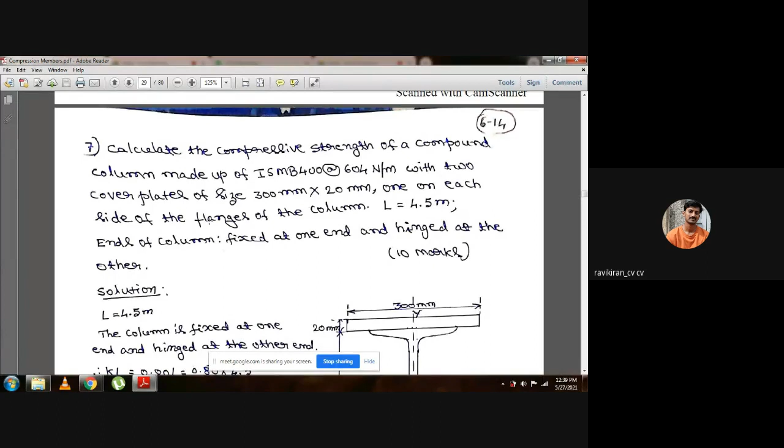Let us take up the problem. Calculate the compressive strength of a compound column made up of ISMB 400 at 604 Newton per meter with two cover plates of size 300 millimeter by 20 millimeter, one on each side of the flanges of the column. The column length is 4.5 meter, this is the actual length, not the effective length. The column has two cover plates, one at the top and one at the bottom, each of size 300 by 20. You can see that in this picture.

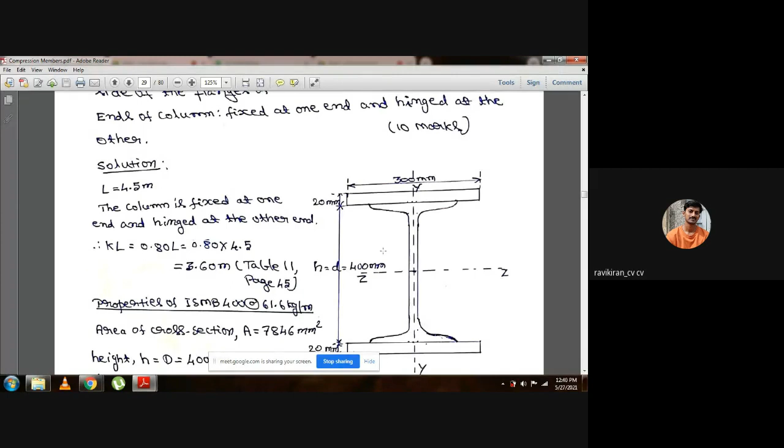Sometimes a picture will not be provided, so you should be in a position to draw these pictures yourself. For that, you should have proper imagination. So according to the question, correlate this picture. Once the data is provided, immediately draw this, and write down whatever data is given. So length is given as 4.5 meter.

The column is fixed at one end and hinged at the other end; this condition is given in the question. Once we have the actual length and support condition, we can calculate the effective length from page 45 of IS 800, Table 11. For this condition, the K value becomes 0.8, so the effective length of the column will be 3.6 meter, that is 0.8 into 4.5 gives us 3.6 meter.

Next, once we have this ISMB 400 section as provided in the question, you need to note down the values. Any one of you please open the steel table and tell me the sectional properties of ISMB 400 at 61.6 kg per meter. Anyone?

I want you to tell the sectional properties by opening your steel table. Okay, let us ask somebody specifically. Aishwarya, 18CV003.

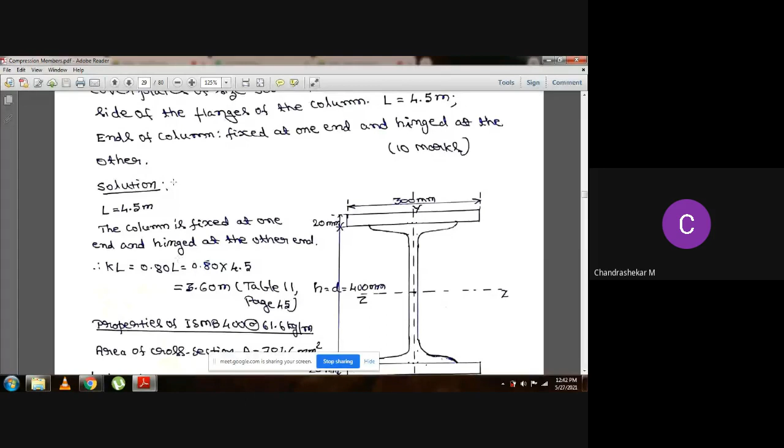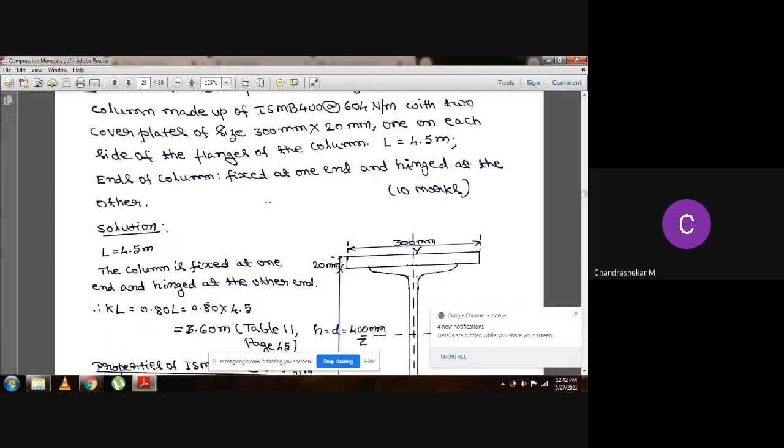Tell me the sectional properties of ISMB 400 at 61.6 kilogram per meter. That is nothing but, if you look at it, whatever is given is in terms of Newton, so to convert 61.6 kg per meter you need to multiply that value by 9.81. As of now you don't have to multiply that. Go to ISMB 400, tell me the properties, because there is only one ISMB 400.

Sectional area 7846 mm square. Depth of section 400 mm. Width of the flange 140 mm. Thickness of the flange 16.0 mm. Thickness of web 8.9.

So how about the IXX value? What do you call that IXX value as? What is the IZZ value? 20458.4. That's it, okay, proceed. That is the value.

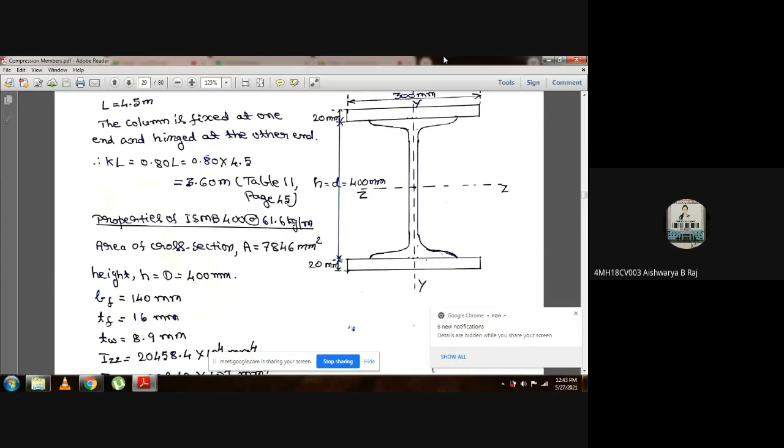Now if you go up in the same column, what does it say? IXX, the value multiplied by 10 power 4 mm power 4. Exactly, you need to multiply whatever value you get from the table by 10 to the power of 4, and the unit of that moment of inertia is millimeter to the power of 4. You got it? Yes, sir.

Any other student? Some students are leaving once we started asking questions. No problem, we'll note down and ask them questions tomorrow, it's not a problem. So whoever is leaving, just... that is good enough, I think you are looking at the table properly. One more thing: what is the value given here for moment of inertia about the horizontal axis? It says from the steel table as IXX. Dilip Kumar left, so let me write down all those names.

Okay, it is given as IXX from the steel table. So when you are writing details in the notes, we have written IZZ. The reason is the IS code does not use XX anymore for the horizontal axis. Now it calls it the ZZ axis instead of XX axis. But the steel tables still use the old style. So whenever you need to get the IZZ value, you should look for the IXX value from the steel table. Similarly, if you are looking for RZ value, you should look for RX from the steel table.

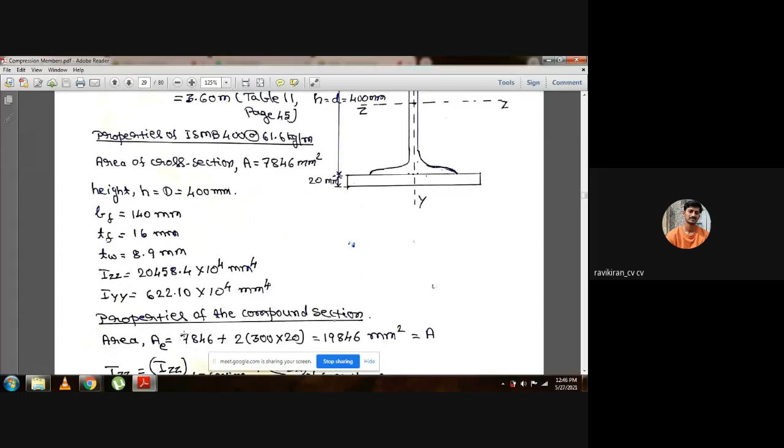So after IZZ, the IYY value is 622.10 into 10 power 4 mm power 4. And once you got these sectional properties, the next step is to...

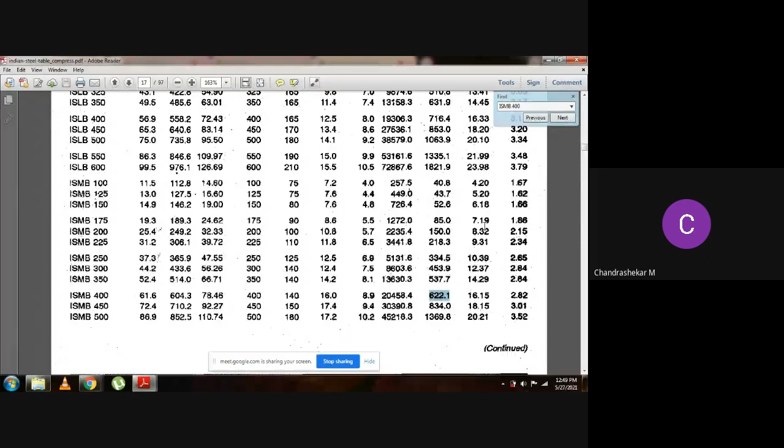So I'm getting the BD cube by 12 value. Okay, it looks like 622 is correct. Width of flange ISMB 400, thickness of the flange is 16.

Okay, one second. So 16 is the thickness of the flange, width of the flange 140, 140 into 16 divided by 12 into 2. I'm getting a different value here.

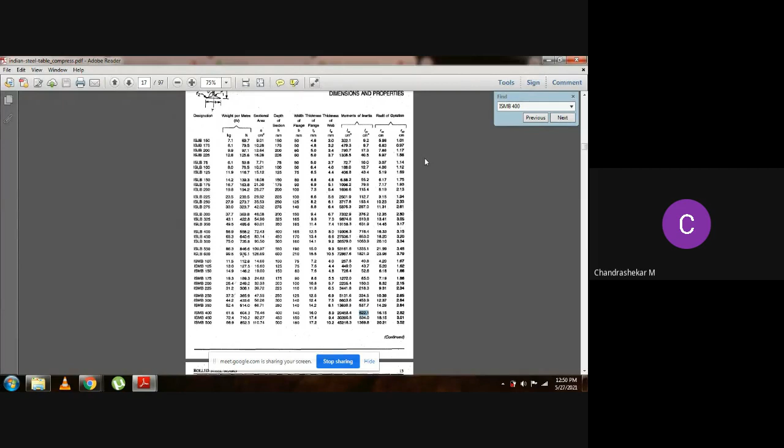Anyway, it is 622, makes logical sense. Students, okay, let us consider for the present moment 622 and we'll continue.

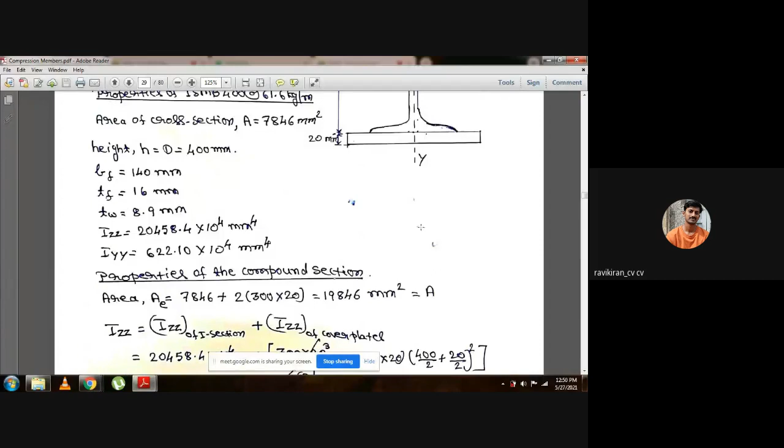Okay, IYY value is 622.1 into 10 power 4. And once you got the sectional properties, the next thing is to calculate the properties for the compound section. Whatever you have written is for only the I section, but here it is a compound or built-up section, correct? Additional plates are there. So for this, you need to calculate the whole section's area as well as the I value.

For that, what is the total area? Total area will be I section area plus 2 times the cover plates area. So cover plate is 300 width and 20 mm thickness, into 2 for the 2 plates. So the total area will become 19846 millimeter square.

Same way, I value for the whole section: the IZZ value is here, which you have taken from the steel table for the I section. Same way for the cover plate, you need to calculate that in terms of BD cube by 12 plus area into H square. So we are in the ZZ plane.

So if you look at the figure, this is the ZZ plane. So the breadth will become 300 and depth will become 20. 300 into 20 cube divided by 12 plus area is 300 into 20, into H square, or area multiplied by H.

H means from the axis to the center of this point, the center of the cover plate. So half of the I section is 400 divided by 2 plus 20 divided by 2. That is what we have written here.

Just cross check, the area is 300 into 20. Somebody has not muted their microphone.

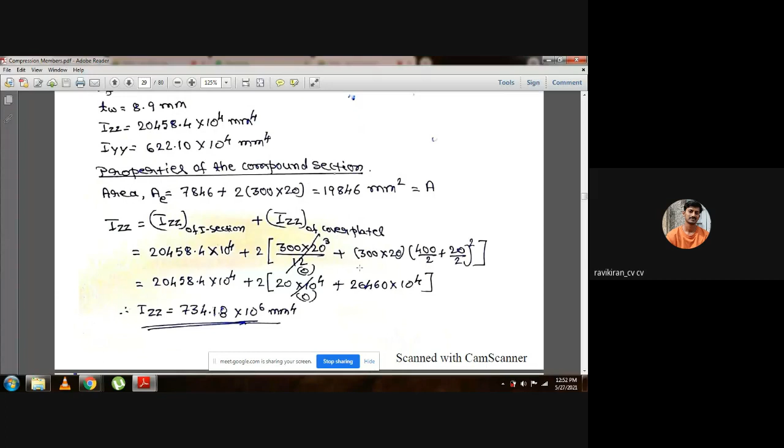Same way, 400 by 2 plus 20 by 2, whole square. So if you solve this, so Chandrasekhar sir, would you like to say something about this? One second. Yes, sir.

See, if you look here, I have ignored the value 300 multiplied by 20 cube by 12. If you don't ignore it, if you include this value, let's check with a calculator.

See, if you consider this, multiplied by 2, you will end up getting 4 followed by 5 zeros. That is going to be the answer, expressed as 0.4 multiplied by 10 to the power of 6. So when you add that to this value, you will get 734.58 instead of 734.18.

By considering this, it hardly makes any difference. If you want, you can go ahead and add that value. Instead of 734.18, you get 734.58. The reason I am ignoring this is to make it a habit to ignore small numbers.

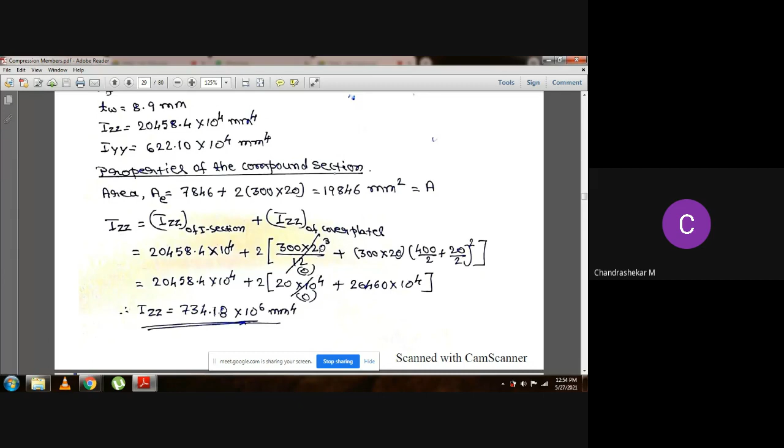When it comes to moment of inertia of the plate, what is the width of the plate? 300, the top width of the plate, multiplied by 20 cube by 12. Go to the figure. See, BD cube, that is 300 multiplied by 20 cube by 12, is a small number.

But when we find the moment of inertia of the same plate about this other axis, it will be 20 multiplied by 300 cube by 12. In this case, you should not ignore it, because 300 cube will fetch a big number. So you should not ignore this. Here, you can ignore it.

Go to that calculation a little bit. Yes. So now I'm ignoring this.

The reason is, say for example, I set a question such that 20 is the thickness of the plate, and I ask you to find out what thickness of the plate is required, given the load. Then 20 becomes unknown, say thickness of the plate, T. The T will become unknown.

If you keep T as unknown, you will get the final equation in terms of T cube. So to find T cube, you will have to solve a third degree equation, which I know almost all of you don't know how to do.

Even if you know how to do it through iteration, it will take some time, especially in the examination, it consumes a little bit of time. So by ignoring this, you can easily get the value of the thickness of the plate without getting a third degree equation.

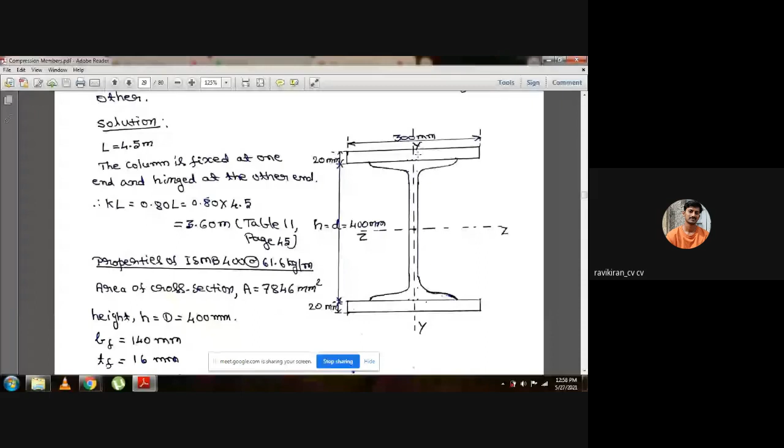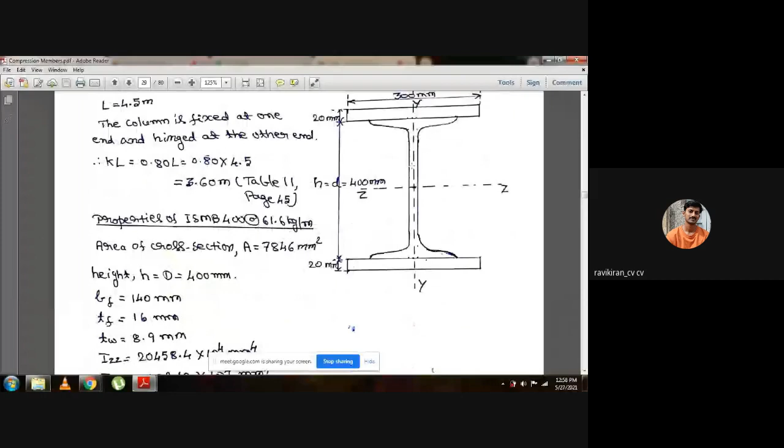H will remain exactly at this particular point. From the axis of this I section to the axis of the plate will be the value 0, so that will not come into the picture. That's why we have written just BD cube by 12 here.

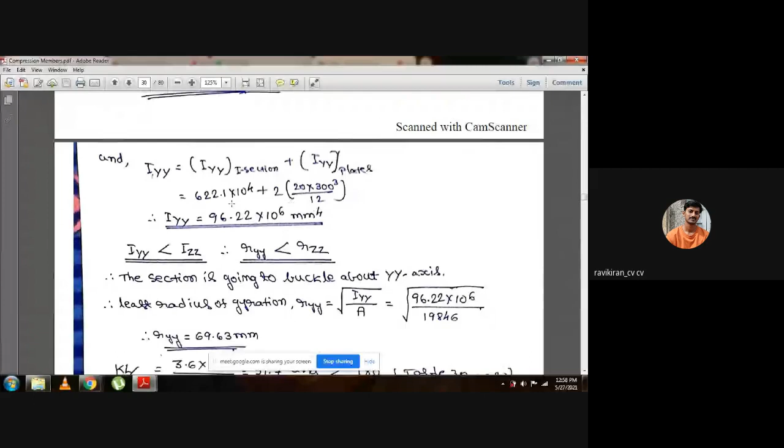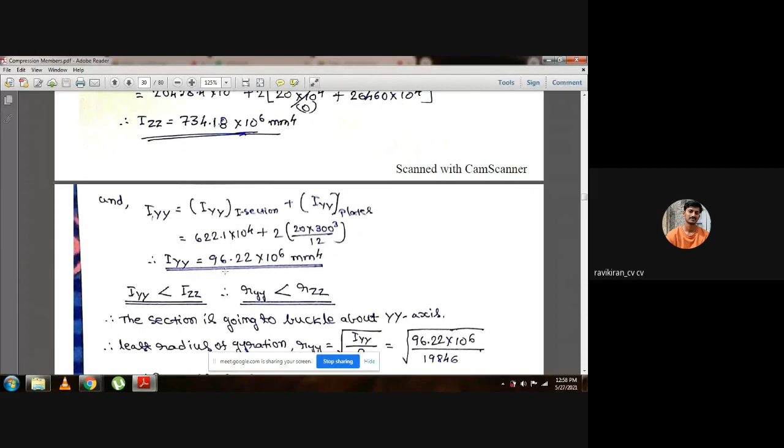Multiplied by 2 because 2 cover plates are there, so IYY value is 96.22 into 10 power 6 mm to the power 4. Once you found both IZZ and IYY value, you should compare these two to find out whichever is the least. Least is in terms of YY direction, right? So when it comes to YY direction, the radius of gyration, if you check, RYY will be lesser than RZZ.

So the buckling class will be in terms of YY axis. Buckling will act in terms of YY axis. So the least radius of gyration, how to calculate? R value is equal to square root of I by A. If you use R value in terms of YY axis, I value also you should use YY axis.

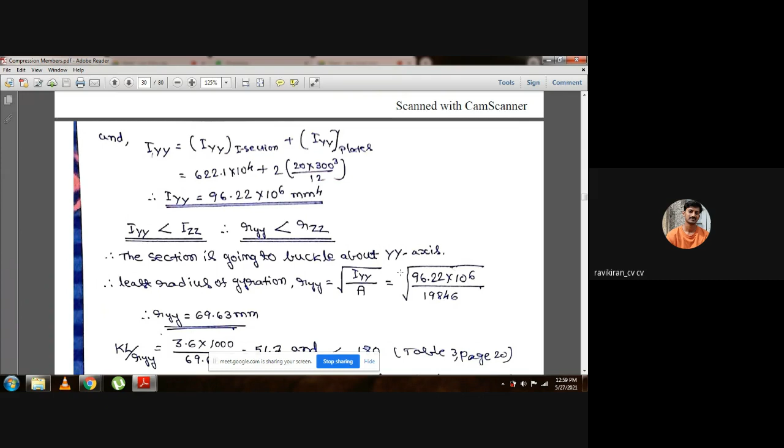So 96.22 into 10 power 6 divided by total area will give you radius of gyration as 69.63 millimeter. So as it is in YY, KL by R. What is this KL by R? This is slenderness ratio. Why do we need this?

Because if you want to calculate FCD from the table, or if you want to pick up the value FCD from the table, correspondingly you need this KL by R value. So if you do KL by R, and this 3.6 is effective length after multiplying with the factor by considering support condition, and 1000 is just from meter to millimeter, divided by RYY which is 69.63, will give us 51.7.

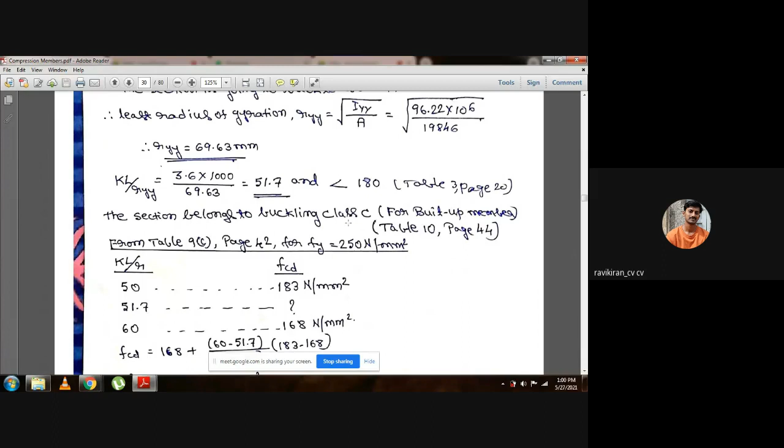And for this 51.7, if you open buckling class C for a built-up member, open table 10 of page 44, it is given for different sections what buckling class you should consider. As it is a built-up section, we should choose buckling class C. That is given in the last row of the table, if you just observe the table you can find out.

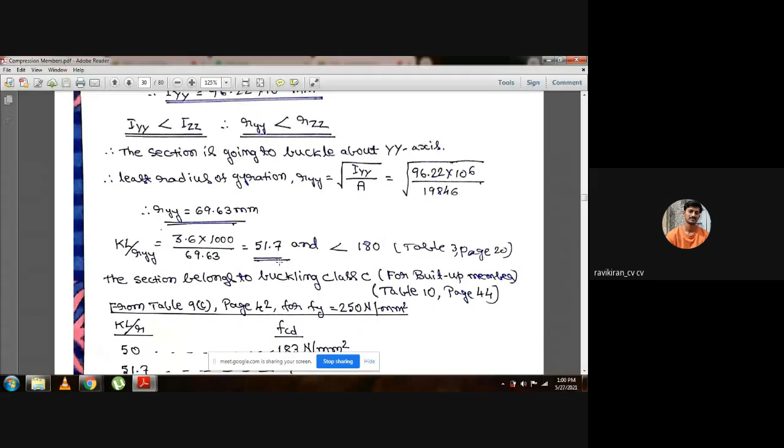So we are going to decide it is buckling class C, and then from table 9C, can any one of you tell me for 51.7, or for the 50 value of KL by R, what is the FCD value? Anyone from the students? For KL by R value 50, open table 9C, page number 42 of IS 800. Anybody?

Okay, Arihant. Hello? Hello? Meghana? Meghana? Sir,

What is the value of design compressive strength for slenderness value of 51 or 50 from table 9C, page 42?

For how do you get 50, for table 9C? For 50, 183, sir. 50? Hello? Yes? For 50, 183. Yes, sir.

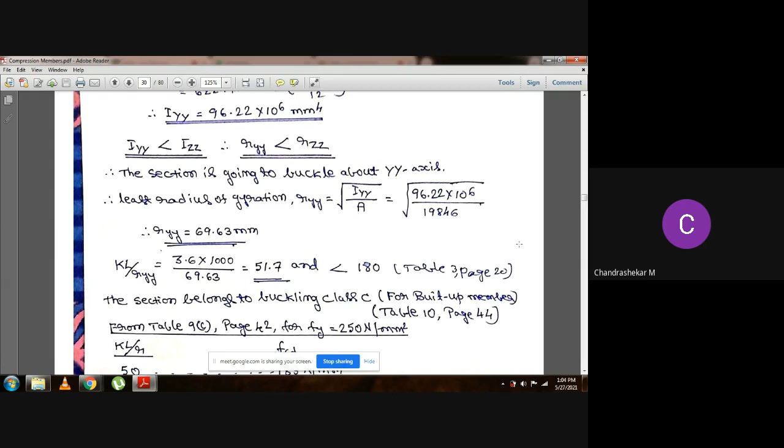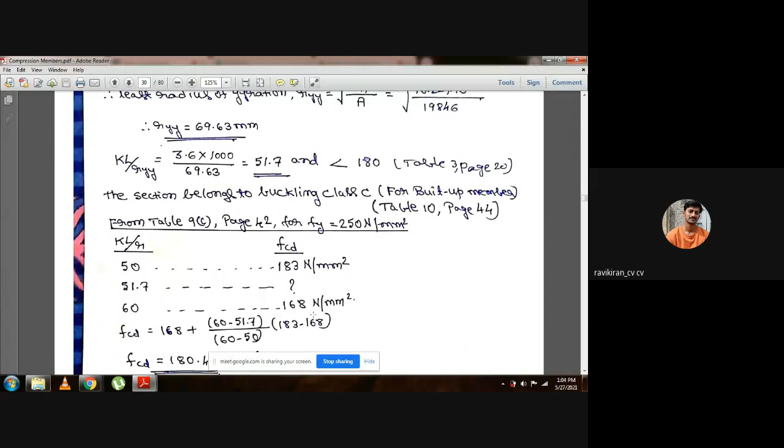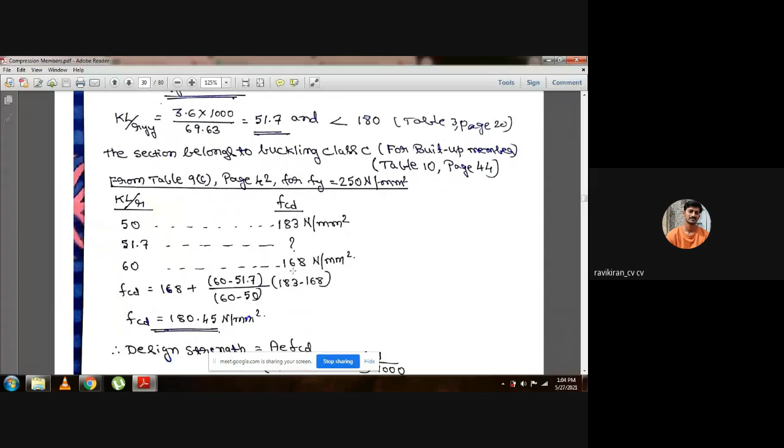So for 50, you have got the value 183. Same way for 60 of KL by R value, it is 168. But we want at 51.7, so we need to interpolate with these two values, that is 183 and 168. If we do that, FCD value finally will be 180.45 Newton per millimeter square.

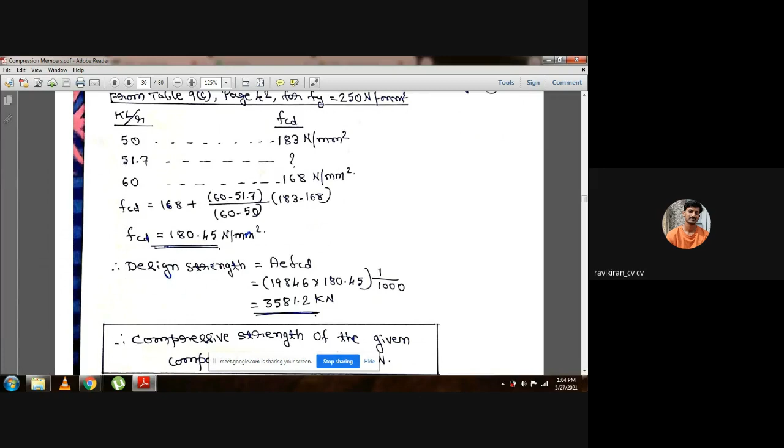So once we got FCD, what is the next thing? Design strength. Design strength will be area into FCD. So area of I section is 19846.

And Ravi Kiran - Yes sir. One more thing I would like to add in this case regarding... Yes.

Buckling class - instead of referring to that welded I-section with just an I-section with two cover plates, we can also refer to the final case about the built-up section. That is always buckling class C, whether you consider bending about the ZZ axis or YY axis.

I think I considered this built-up member, the last one. Okay, the last one, not the one we just discussed. Sorry, the last one, just to be sure about it.

Okay Ravi Kiran, you can proceed.

So the design strength will become area into FCD. Total area, including cover plates, is 19846, multiplied by the FCD value 180.45, multiplied by 1 divided by 1000.

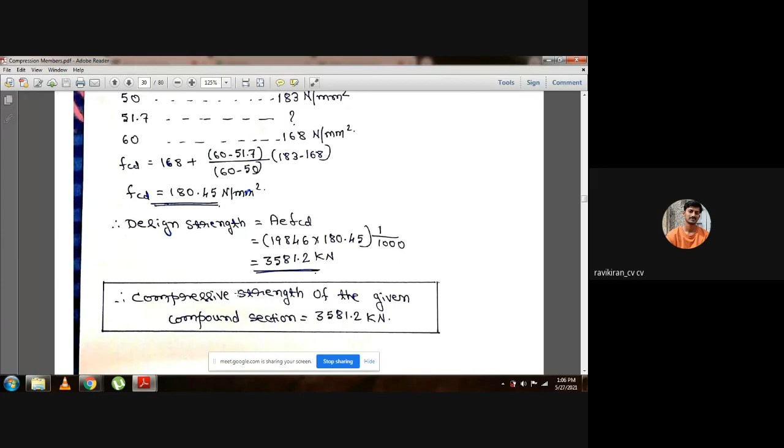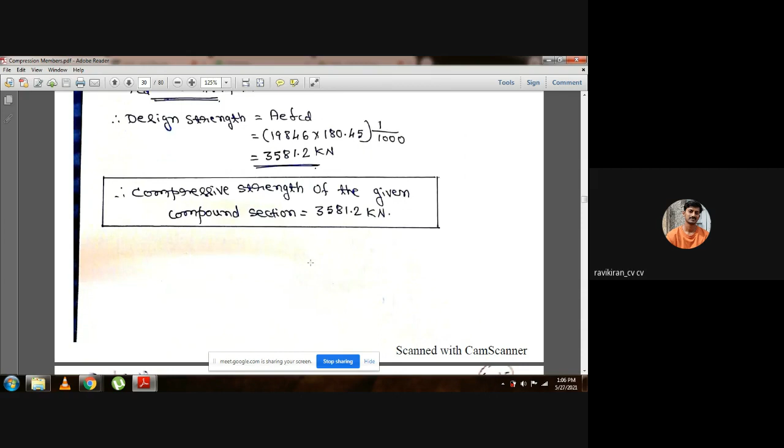This gives 3581.2 kilonewton. Initially the question asked us to calculate the design compressive strength, so we have calculated the design strength as 3581.2 kilonewton for the compound section. If anybody has any doubt, you can ask us now.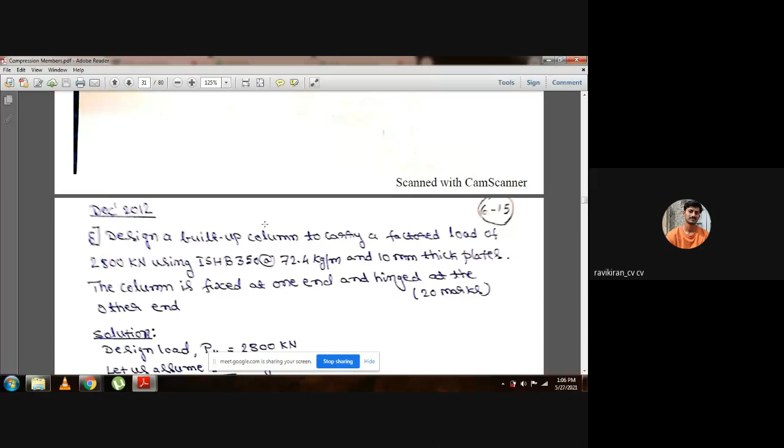Anybody? Okay, if there is no doubt, we will continue with the next problem.

Design a built-up column to carry a factored load of 2800 kilonewton using ISHB 350 at 72.4 kg per meter and 10 mm thickness plates. It is a built-up column carrying a factored load of 2800 kilonewton. So ultimate load is given, section ISHB 350 at 72.4 is given, and also 10 mm thick cover plates are given.

The column is fixed at one end and hinged at the other end. Till now we have discussed both ends fixed, but in this problem the case is changed - one end is fixed and the other is hinged. So based on this, the effective length constant will change.

Secondly, only the thickness of the cover plate is provided in this problem - the width of the cover plate is not mentioned. In the earlier case it was given, but in this problem it is not given. So we'll try to find out how to deal with such cases.

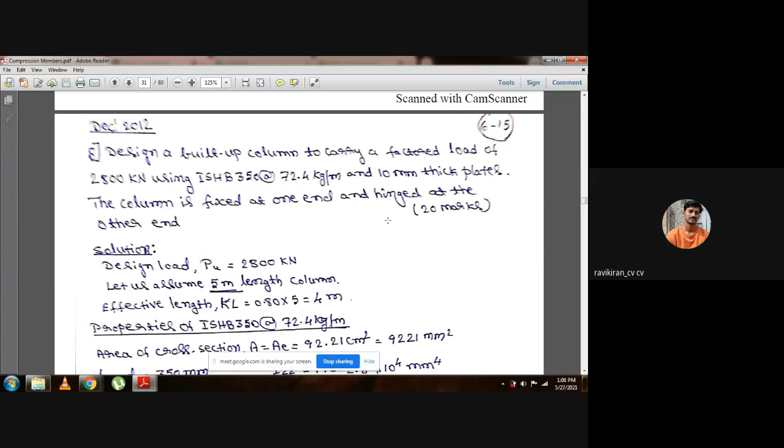So if it is not given, let us assume the value initially - let us assume 5 meter length of column. For that actual length, the support condition constant for one end fixed and one end hinged is 0.8, so you will get the effective length as 4 meter.

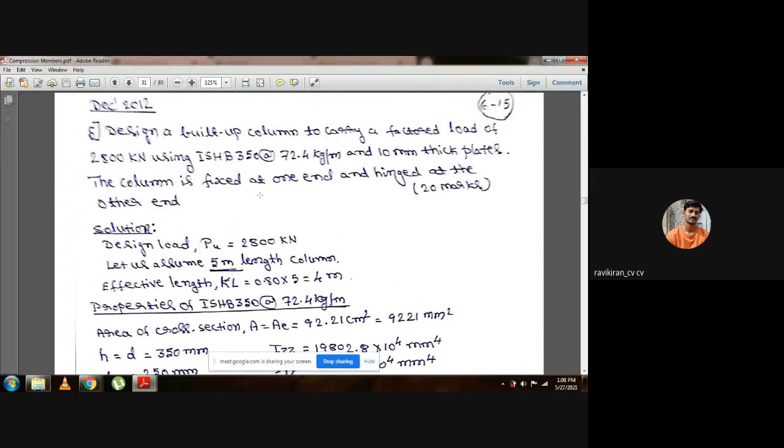Once you get this, next write down the sectional properties as per the section ISHB 350. Can anybody mention the sectional properties of ISHB 350 at 72.4 kg per meter? Darshan, from the steel table.

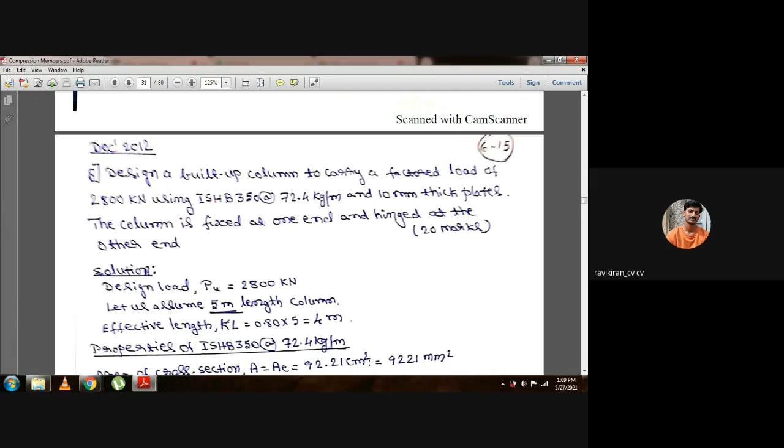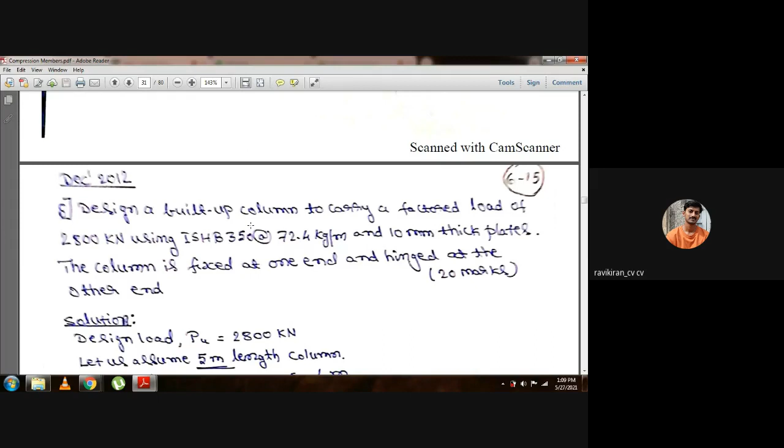Sir, 72.4 means in Newton, sir, multiplied by 9.81. That value is also given - just check in the next column.

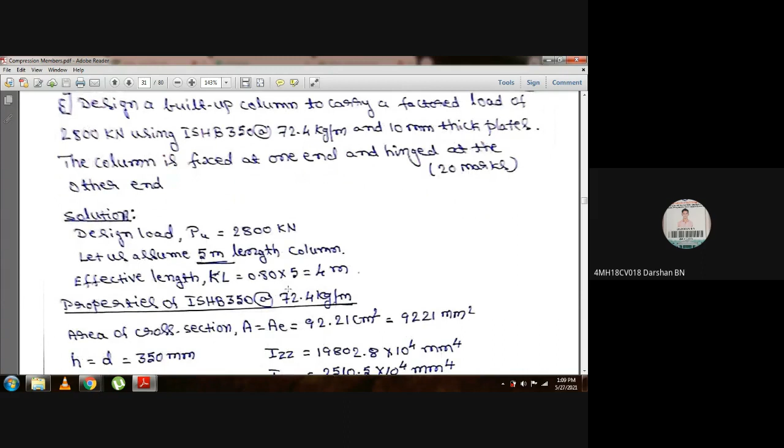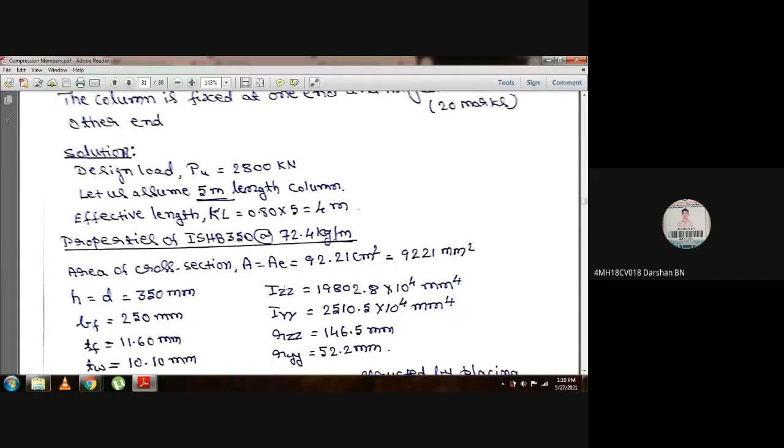Unit? Mm, sir. Okay. IXX is 19802.8 into 10 to the power of 4 mm to the power of 4, sir. Okay. IYY is 2510.5 into 10 to the power of 4 mm to the power of 4, sir.

So Darshan, is that IXX? Yes sir. You should talk in the language of IS code, IS 800 code. IZZ, sir. Yes. So is that clear to you? Yes sir.

So we should always talk in the language of the IS code. This book is written by an individual, KLV Ramu, and they still use the old way because there are several design offices wherein when they use this table, they are still using IXX value. So there are old-timers who still take this as IXX - even just to help those design engineers, they have maintained IXX. But when you are studying and referring to IXX from the steel table, while writing down in your notes, you should write that as ZZ.

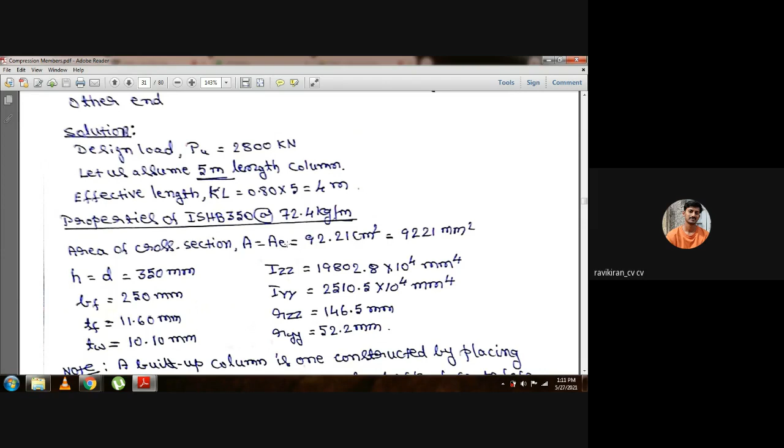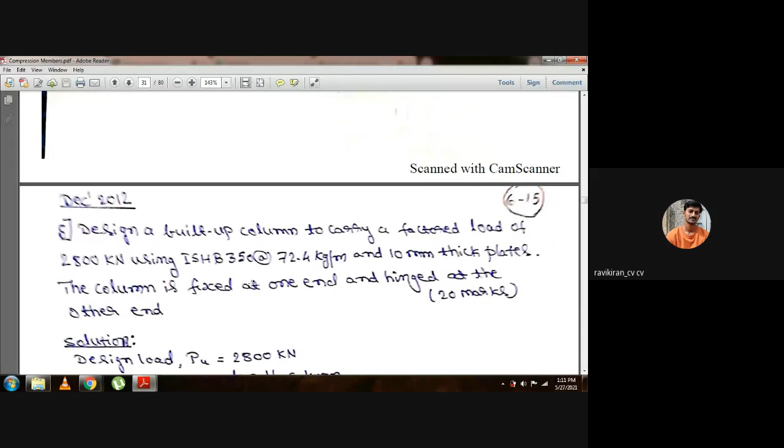See, in the question, if you observe, it is mentioned that it is a built-up column, but the width of the plate is not given, only thickness of the plate is provided, and ISHB is mentioned. Correct. So you need to understand what is a built-up column first.

A built-up column is one constructed by placing members of the same size back to back, or face to face when it comes to channels. Same way, if it is I sections, side to side. You should imagine this.

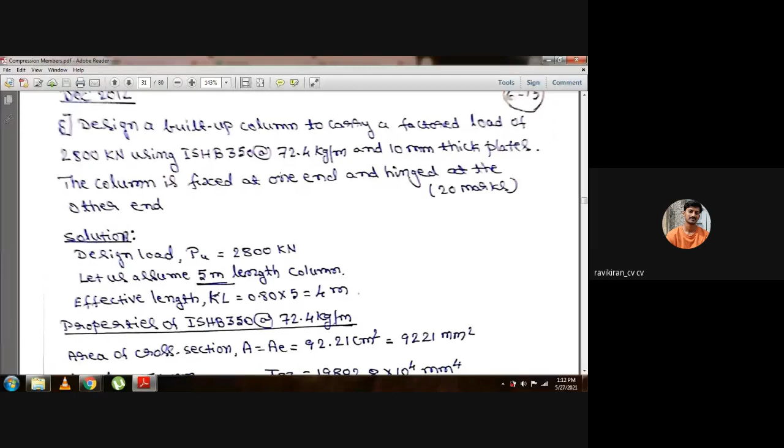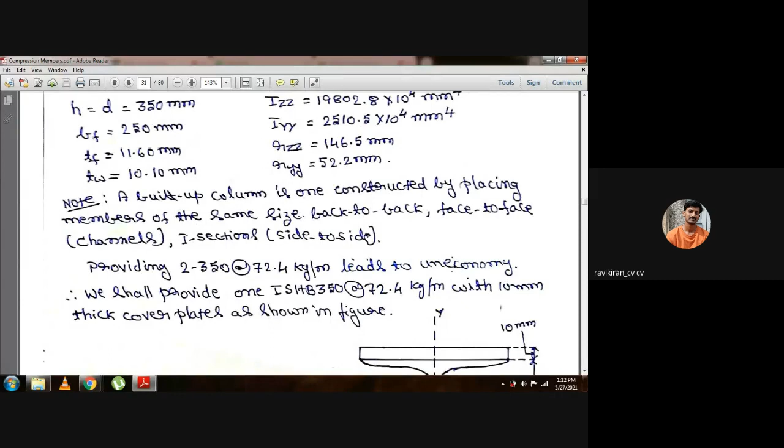Or even if a cover plate comes, it should be on top of the flange, wherever flange comes there. So providing 2 of ISHB 350 at 72.4 kg per meter leads to uneconomy. Here they didn't tell how many I sections you should provide, but built-up column he has mentioned, so we can choose two I sections also. That will become a built-up section, but if you do so, that will lead to uneconomy.

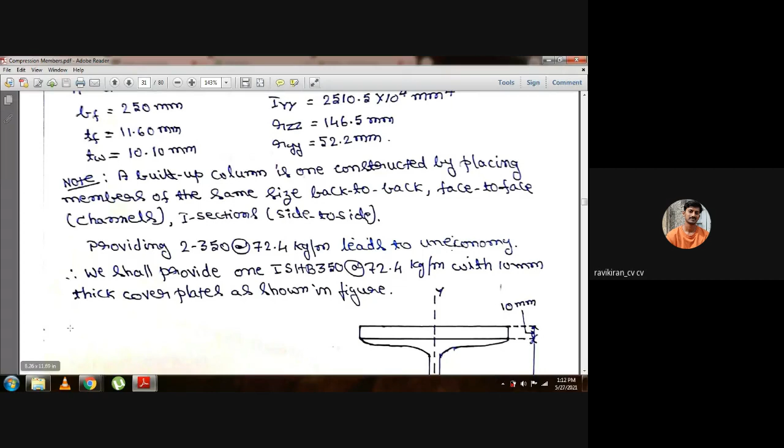So let us not proceed in that way. We shall provide one ISHB 350 at 72.4 kg per meter with 10 mm thick cover plates as shown in the figure. If you properly observe this figure, this is an I section having cover plates at top and bottom in rectangular manner, ending at the edge of the I section itself. The thickness is 10 mm and width...

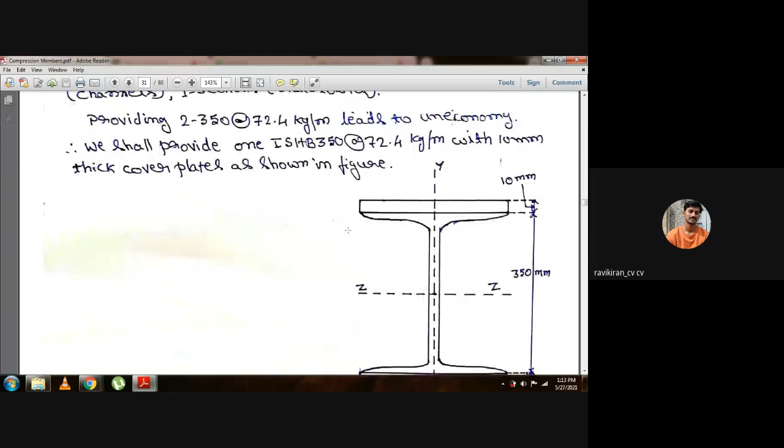What is the thickness or width of the flange? Width of the flange is 250, right? Width of the flange BF is 250 mm. See, we ended here in the same line, means this width is also 250 for the present moment. Okay, so by considering that, let us solve the problem.

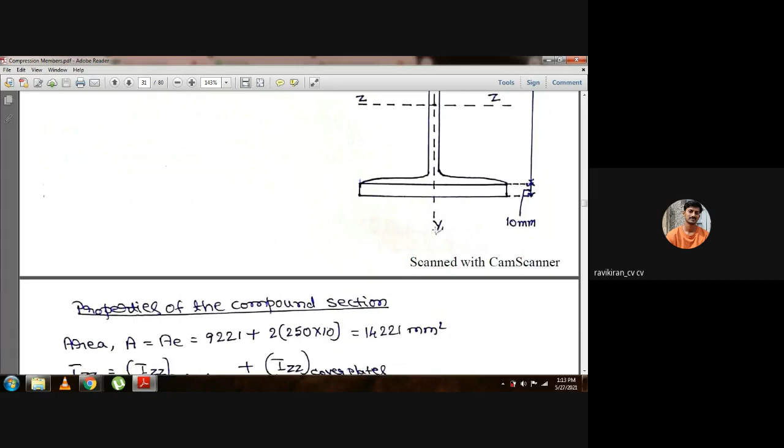So initially what we need to do, we need to calculate the total area for the built-up section. For I section, you have a value for the area that is 9221 millimeter square. For plates, that additional 2 cover plates, 250 into 10, because we consider 250 multiplied by 2 for 2 plates, will give us area of 14221 mm square.

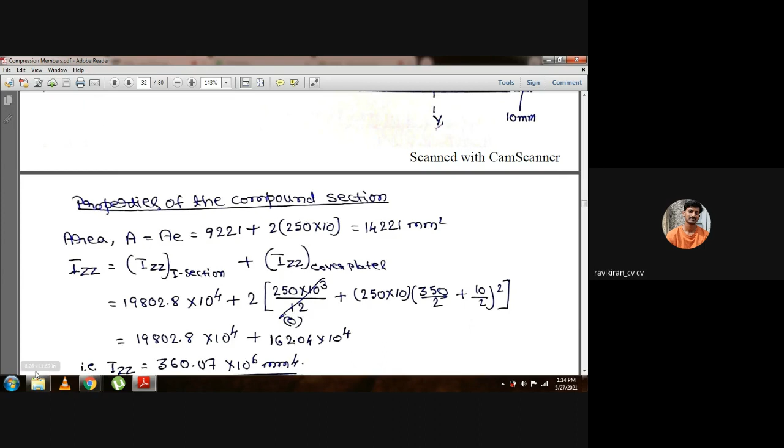Same way, IZZ value for I section you have readily with you from the steel table, plus IZZ for cover plates, 2 times BD cube by 12 plus area, that is 250 into 10. We are in terms of ZZ plane, so breadth will become 250, depth will become 10, plus area into h square. H is height from the center, means it is 350 by 2 is the I section plus 10 by 2 is the plate, center of the I section to the center of the plate. So if we solve this, here it is written 0, just Chandrasekhar sir explained in the last problem.

Okay, you can ignore it, or you can consider it if you want. IZZ value will be 360.07 into 10 power 6 mm power 4.

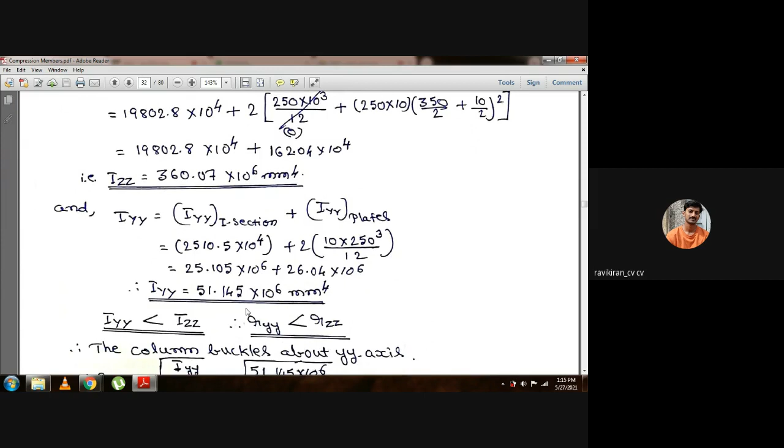Same way we should go with the IYY direction. So in terms of YY, I section value is readily available, plus for plates you need to calculate that is BD cube by 12. B will become 10 and D will become 250. AH square will not come into the picture because it is in the same line. So if you solve this, IYY will be 51.145 into 10 power 6 mm power 4.

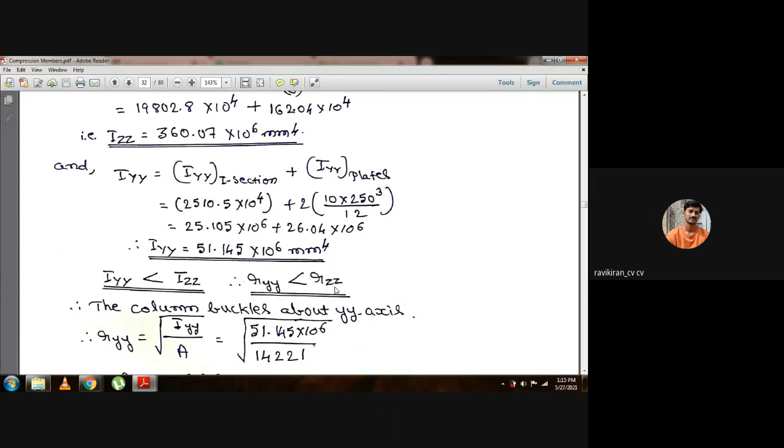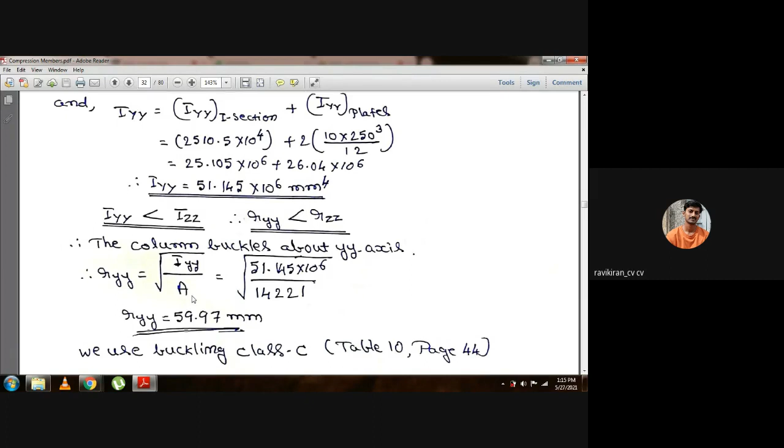Now compare IZZ and IYY. The least value is in terms of YY direction, so IYY is less than IZZ, therefore RYY is less than RZZ. So next step is to calculate R value, that is radius of gyration for the buckling class about YY axis. So RYY is equal to square root of IYY divided by total area. If we solve this, we get RYY as 59.97 millimeter.

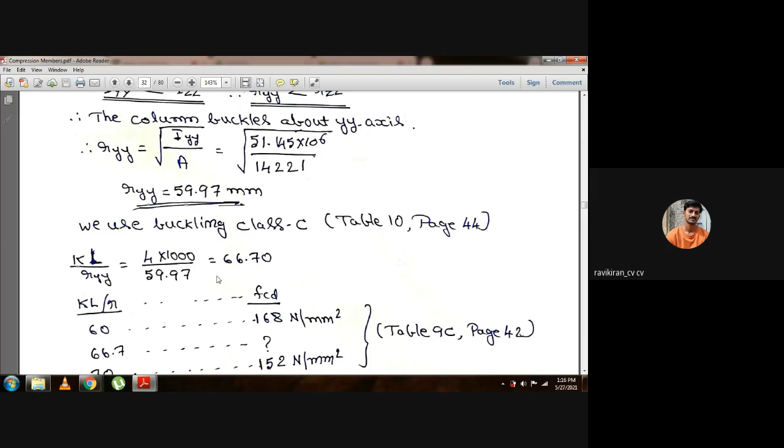See, as it is a buckling built-up member, you should choose buckling class C, it will automatically be buckling class C because it is a built-up member. That you will identify from page 44, table 10. So what is KL by R? K is the effective length, KL is 4 meter, and RYY is 59.97. Finally we got 66.70 as slenderness ratio value, that is KL by R value.

For this, any one of you from IS 800, can you tell me what is the value of FCD for 60 and 70? For 60 and 70? Okay, Fizanas. 18CV030.

Go to the right table. Yes, yeah, tell me what is the value of FCD for buckling class C for 60 and 70.

You should be ready with this. As soon as you find the KL by R value, you should open that page. Do you have the code book with you? Yes, sir. Okay, what table are you referring to? Which page number? Sir, page number 44.

44? Okay, if you go to the top, what does it say? What buckling class? So buckling, you are saying page number 44. Do you see anything on page number 44? It only says about the buckling class, right? We already said it belongs to buckling class C, so you don't have to refer to this. We refer to page number 44 to decide which buckling class that section belongs to, depending on which axis it bends.

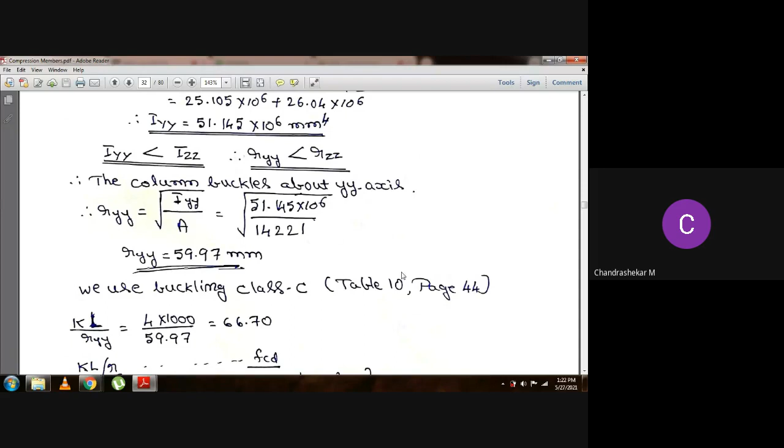So to find out the right FCD value corresponding to the KL by R value of 66.7, what are you going to do? How do you get that value? You are going to get that value through what? Have you heard of the word interpolation? Look here, have you heard of the value called interpolation?

Pisanas. Once we started asking questions, people are leaving. Not a problem, we can catch them tomorrow.

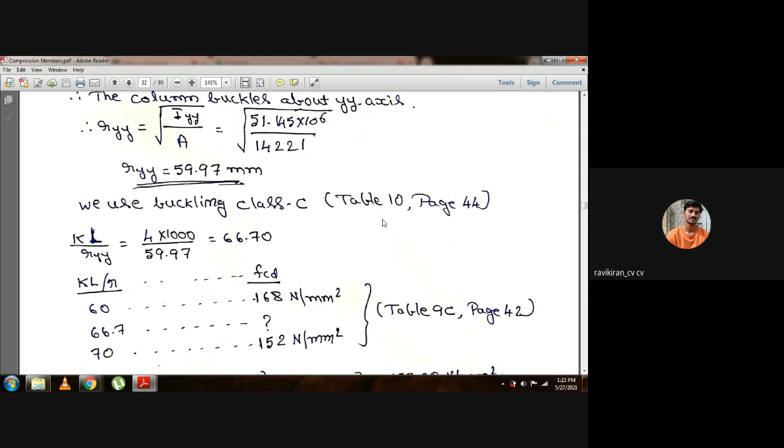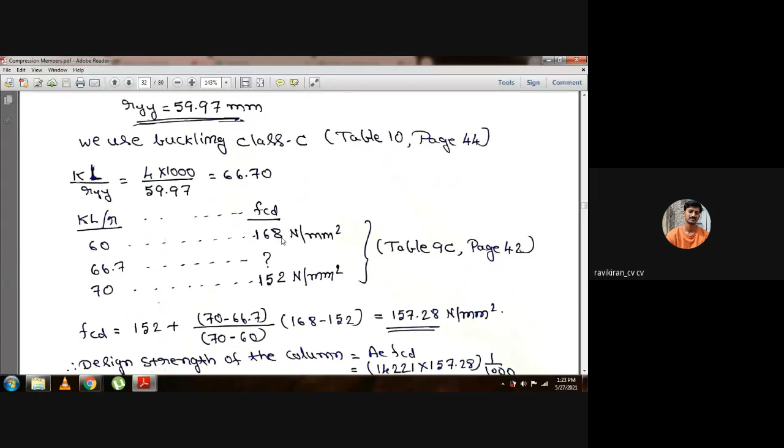Shall I continue, sir? Yeah, continue, Mari. Okay. So once you got values for KL by R, that is slenderness ratio, for 60, FCD value is 168, for 70 it is 152, but we wanted 66.7. By interpolating these two values, we are going to get the method of interpolation. Here it is given, FCD value is 157.28 Newton per mm square.

Once we got the FCD value, design strength of the column will be area into FCD. Area we have already... Siddharaju, mute your voice. Raju, yes sir. Sorry, no, you muted. Yes sir.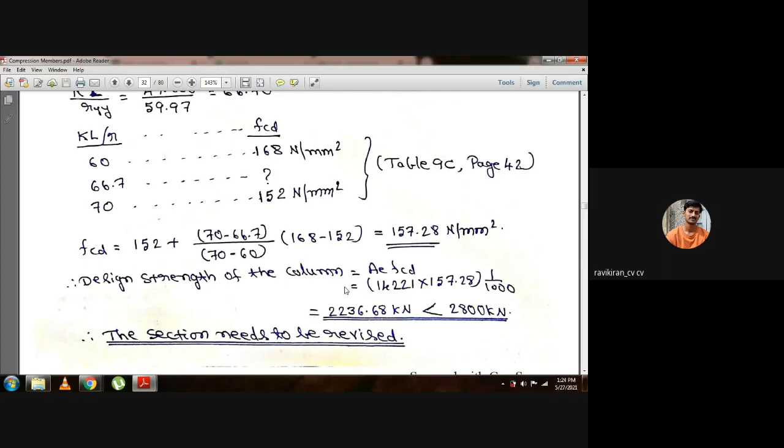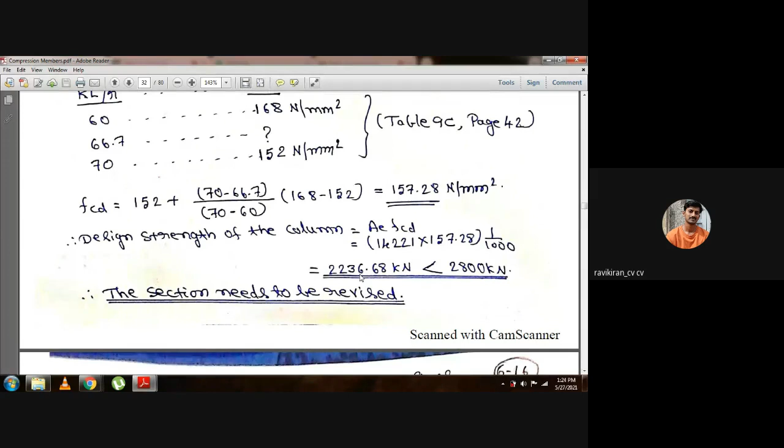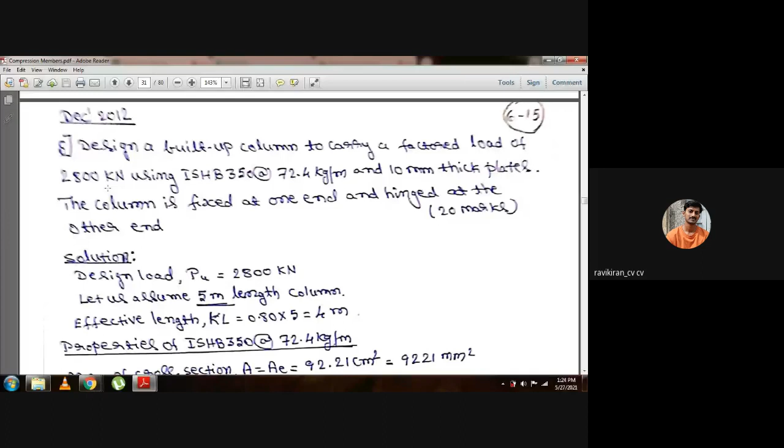So once we got the FCD value, the design strength of the column will be area into FCD. Area we have already calculated. If you do this, we are going to get 2236.68 kilonewton. So what is the ultimate load given in the question? If you go back to the question: design a built-up column to carry a factored load of 2800 kilonewton. We should design a column in such a way that it should carry 2800 kilonewton. But what is the load carrying capacity now? It is 2236. That means to say whatever section we provided is not sufficient.

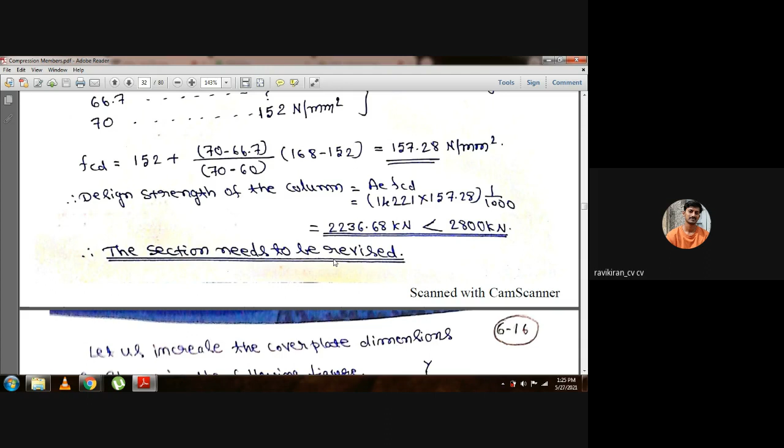Okay, so we need to increase the section and redesign from the beginning, using the same procedure but with an increased section. For that, what we are going to do, if this is made just for your understanding only, is select the width of the plate as 250 - this is the answer we got. So for that, we are going to increase this width of the plate.

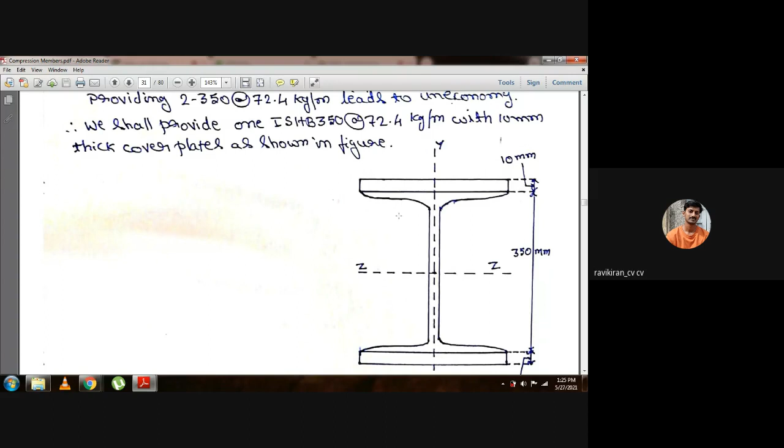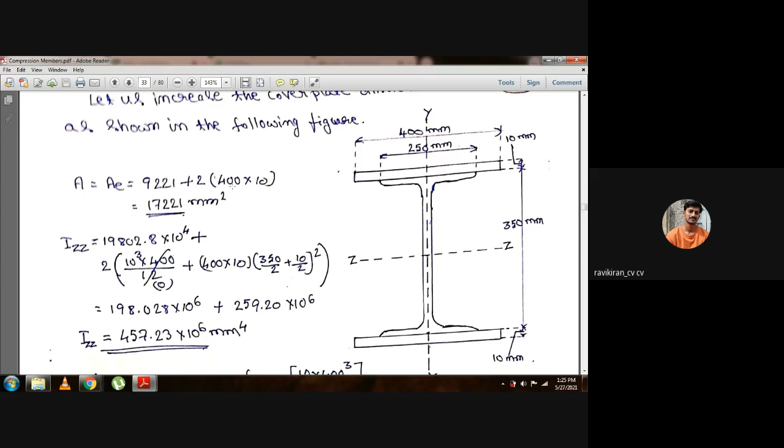Let us increase the cover plate dimension as shown in the figure. Initially it was 250, but now we are increasing it to 400. So the width of the plate is 400 and thickness remains same 10 millimeter as provided in the question. So again, area calculation, instead of 250, we made it 400, and correspondingly, area is increased.

Same way, IZZ value is also increased because of this width increment. Same way, IYY value is also increased compared to the previous section. Same procedure we are following here. There is no much difference, only the member width is increased. Instead of 250, it is 400.

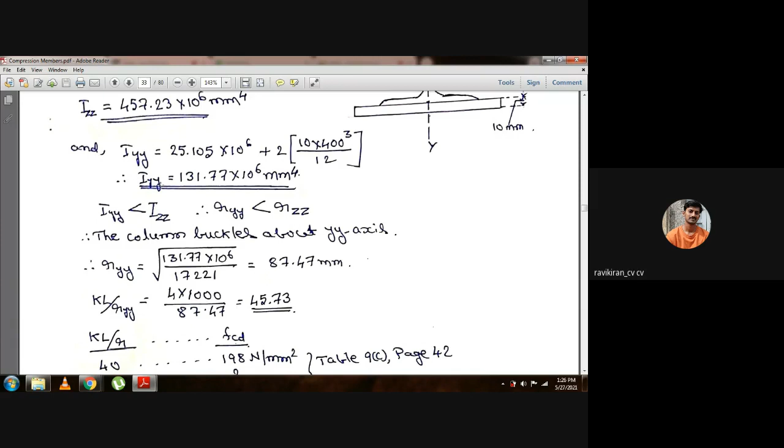Again, buckling will be in terms of YY axis only, since IYY is less than IZZ, therefore RYY is less than RZZ. So radius of gyration in YY is equal to square root of I by A. I value is 131.77 into 10 power 6 and area is 17221 for the present area after increasing the section. So RYY value is 87.47.

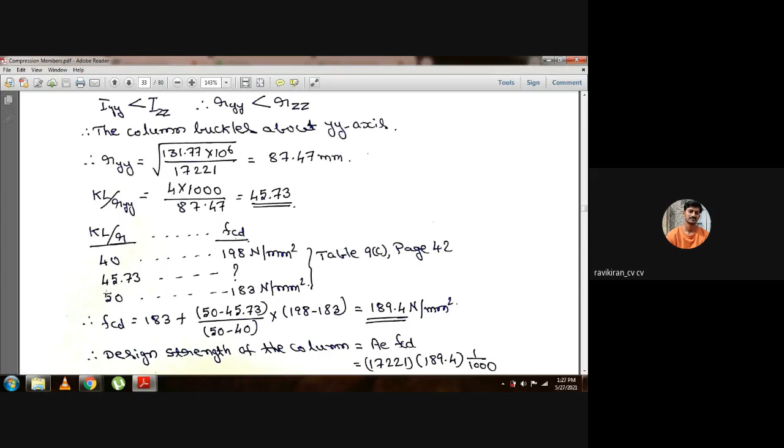Once you got R value, KL by R is equal to 45.73. We have FCD value for 40 and 50: for 40 it is 198, for 50 it is 183. For 45.73, if you do interpolation between these two, you'll get 189.4 Newton per mm square.

Once we got FCD, what is the next step? Design strength of the column, that is equal to area into FCD. Area is increased, FCD is also increased. See what is the final value, that is strength of the column.

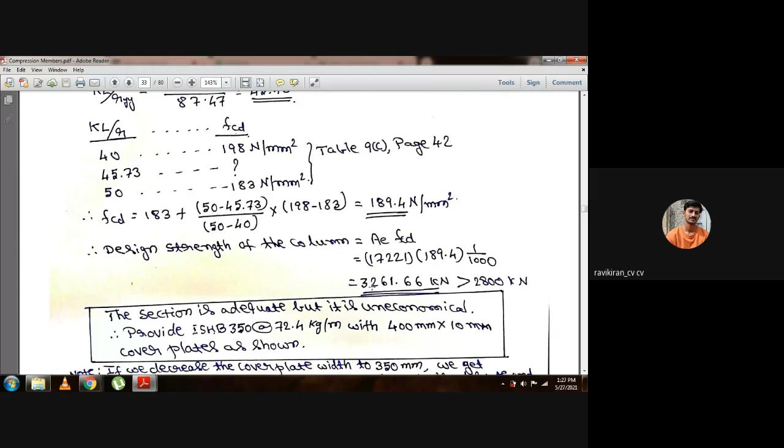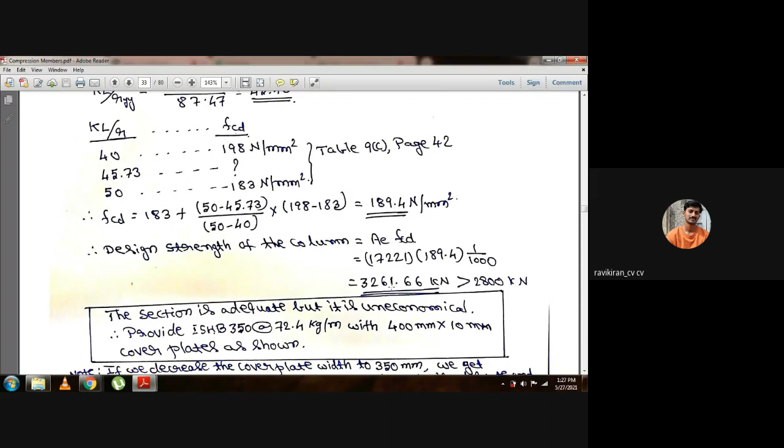3261. What does it have to carry? It is supposed to carry 2800 kilonewton. But because of increment of the width of the plate, the capacity is increased to this level, that is 3261. The section is safe, but it is uneconomical. The section is adequate, but it is uneconomical.

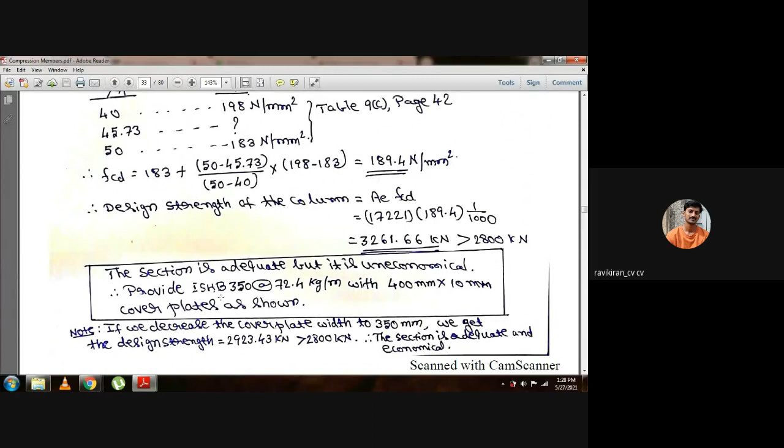So you can end it here. If you want, provide ISHB 350 at 72.4 kg per meter with 400 mm by 10 mm thick cover plates as shown in the figure at this stage. Or, if you want to make it more economical as well as adequate, you can reduce the width of the plate. Instead of 400, you can reduce it to 350.

Sir has tried with 350 also, and for that got the value as 2923 as design strength. This 2923 is obviously greater than 2800, right? So we can end up with this also. Then the section is also adequate as well as economical. You can stop at this level by increasing the cover plate to 400, or stop at this level also. But if you want a more economical section, you can reduce it further.

This is just for your reference. I think we'll move on now. One more thing, Ravi.

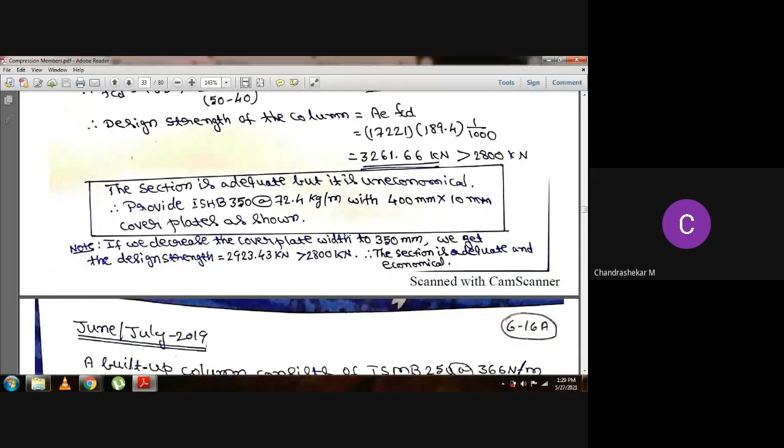Guys, one more thing. In the examination, you don't have to do all those things, you don't have to revise the design. If you go up a little bit, for the first part where we got the unsafe design, here. In the examination, if you are given the same problem and you try the plate width equal to the flange width of the I section, you are going to get a value less than 2800 kilonewton.

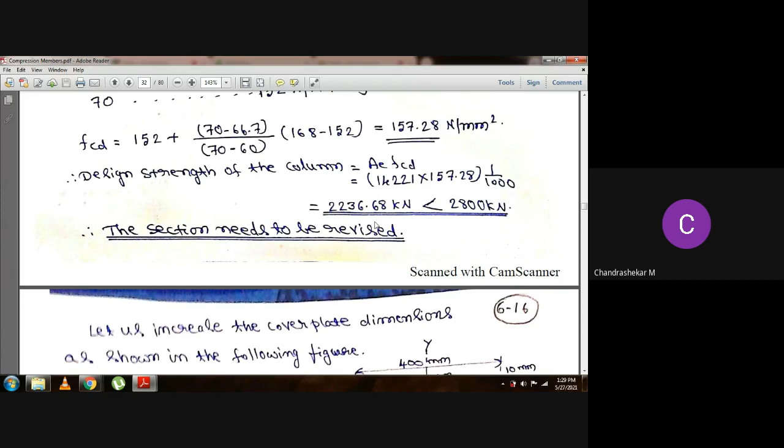So then you don't have to redesign it, because you will end up wasting time. You simply write the comment, the section needs to be revised, and end the problem. That is enough for you in the examination. In case, instead of taking the width of the plate equal to the flange width, if you take it much wider, say 400, you are going to get an adequate section but uneconomical. Write the comment and end it. You don't have to go and redesign it.

Just do the design only once in the examination. But when it comes to reality, when you are really designing a section, then you need to do economical design by revising it if required, because there money is involved. Here it is not; time is important for you in the examination. Just do one calculation and declare whether it's safe or unsafe.

If unsafe, you declare and write the section needs to be revised, and end it. In case you get a higher value, write that the section is adequate but uneconomical, write that comment and end the problem. Is it clear to you? Okay guys, thank you.